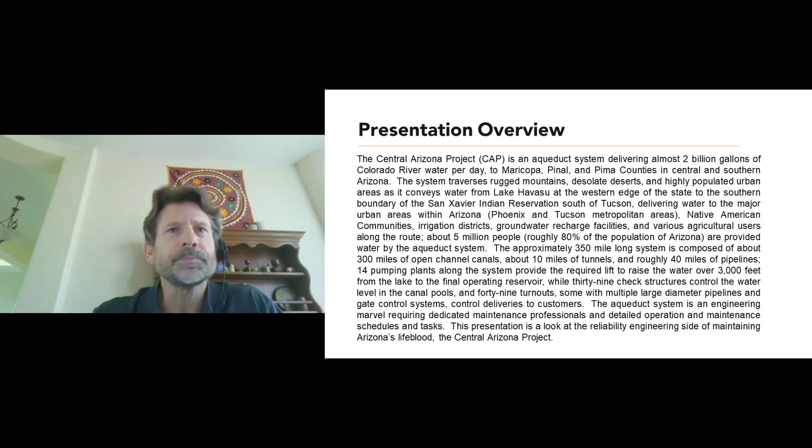What I'd like to do is just give a quick overview of the Central Arizona Project, or the CAP, a lot easier to say that. Talk about the pipelines in particular, that's my primary focus of responsibility, and then talk about what does a reliability engineer do.

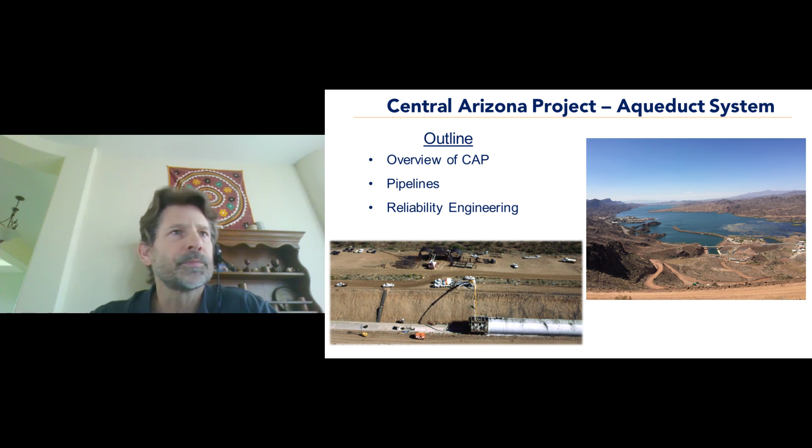Okay, so I give a lot of talks on the Central Arizona Project. And I half joke when I say we're just a water delivery company. We take water from point A and give it to point B. Point B being about 550 kilometers away, almost 1,000 meters higher in elevation.

We are a desert, and one of the things I want to point out is we get less than 20 centimeters of rainfall annually. In the last couple of years with the drought, we've been getting less than that.

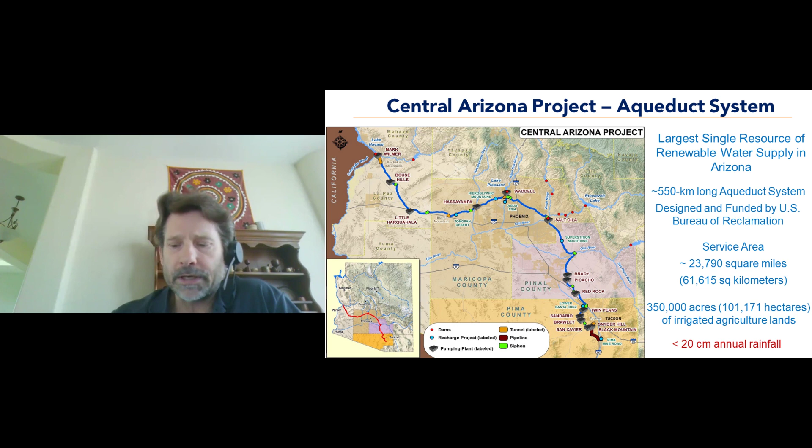It takes a lot of infrastructure for us to move water across the state. So some of the major assets we have are 15 pumping plants scattered along that 550 kilometers, 39 check structures, and multiple check structures between pumping plants to control the flow of water and to keep the elevations different in the pools as needed for making deliveries to our customers. We turn out water to our customers through 49 turnouts scattered across the system.

We've got 6 groundwater recharge facilities that we have been using to recharge groundwater aquifers, but with the reduction we've had to take on the Colorado River this year and last year, we are no longer doing any recharge. We also have about 3 inline reservoirs that help us regulate the flows through the canal, and one large offline reservoir.

With an earthen dam, and that's this picture right here, Lake Pleasant, an enormous lake about 20 minutes or so north of Phoenix, with a large earthen dam.

What we're seeing here are the intake towers to the pumping plant. Actually, this is the pump generating plant. In the fall and winter, we fill the lake, pulling water off the Colorado River, and then in the hot summer months when electricity is very expensive, we're actually pulling water out of the lake and sending it down to our agricultural customers.

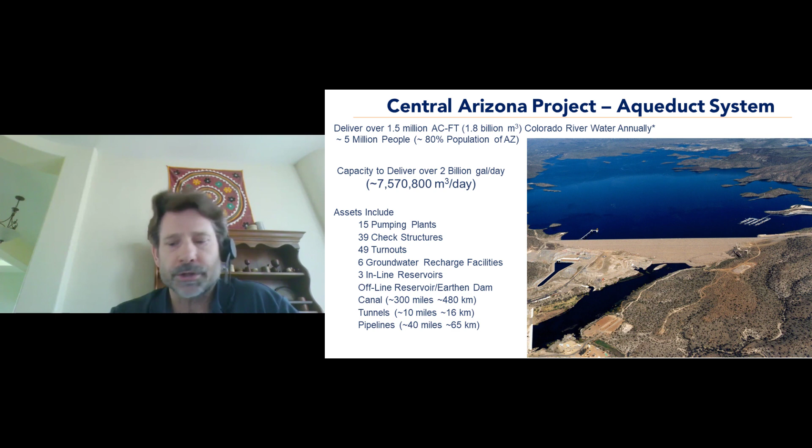So remember that first picture we looked at, our first pumping plant? I was standing up here at the outlet of the 2 steel discharge pipes that bring water out of this pumping plant. We lift it about 250 meters to this point over about, I think it's about a kilometer to get up to there. And then from there, it goes through a 12-kilometer tunnel, flows by gravity down to one of our next pumping plants.

But one of the big projects I had just a few years ago, over 2 different summers, was relining these 2 steel pipelines. They actually start about 100 feet below the bottom of the lake here.

And over here, this is just a typical pumping plant. It's one of the larger ones out on the western side of our system, but all of the plants have the canal leading into the forebay, and through however many pumps we happen to have in whichever pumping plant that is, it just lifts it up and then flows by gravity down to the next pumping plant.

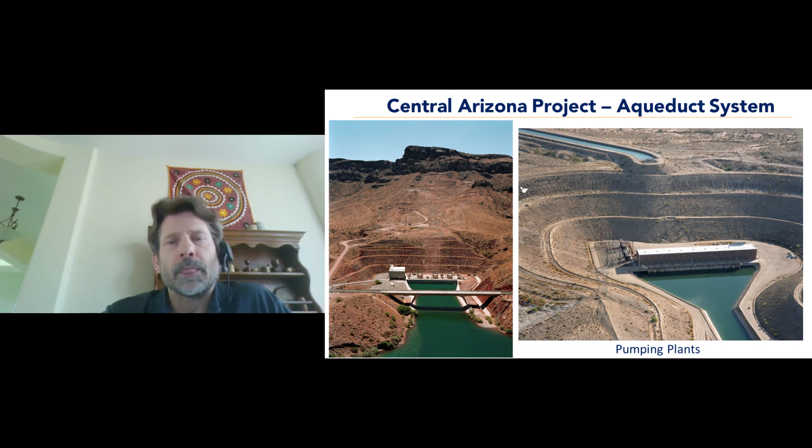What this graph is showing is just the lift that we have at each of the pumping plants. So this first plant lifts water about 250 meters, and it flows by gravity to the next plant, where it lifts it again. But all told, we're lifting water about 915 meters to be able to get it to our last operating reservoir. And then from there, it flows by gravity to the final bit of our system.

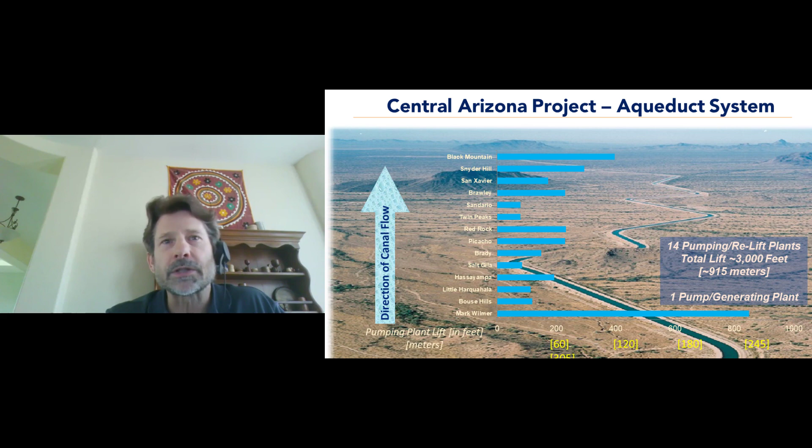We also use them to regulate flow or stop flow going into our pipelines and tunnels going across the state.

I was underground most of that day. One of the things as a reliability engineer, we also evaluate these radial gates, and in a 5-year cycle we're out inspecting every single one of them, making the determination of which ones we need to repair next. Sometimes we'll just pull the whole gate right out of the structure, send it back to headquarters, and refurbish it. And while that's happening, we have dropped in the spare gates that we have.

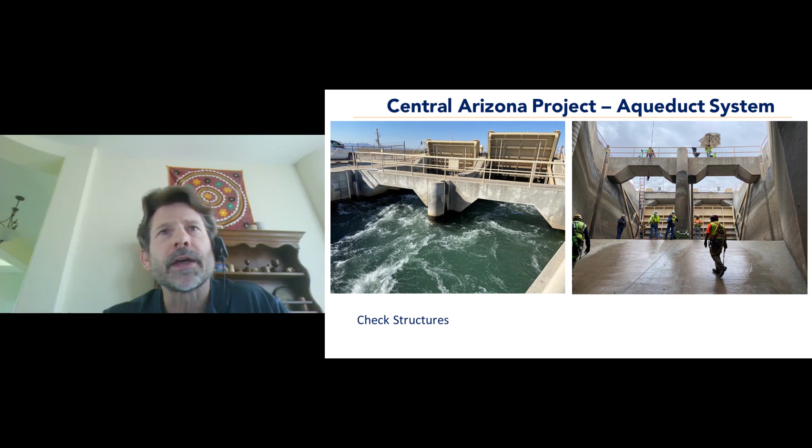I've also been tasked with redesigning, and have done, all the cathodic protection system for all these gates.

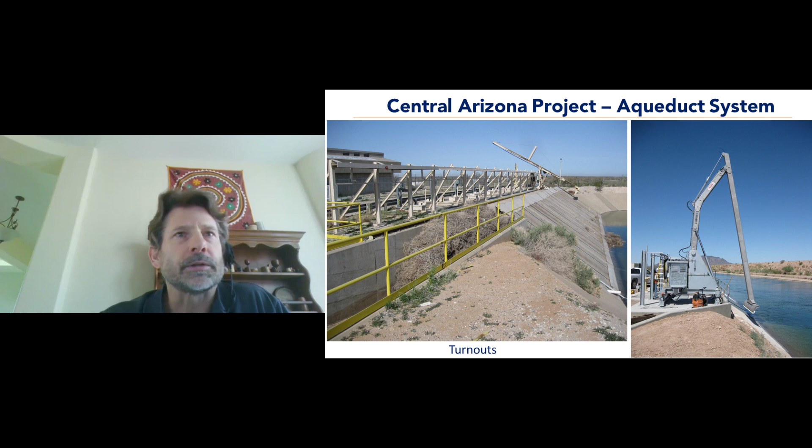A couple other pictures of turnouts. We get a lot of debris built up in the turnouts as the velocities drop, so occasionally we get in and have to clean them out.

What happens when the sediment builds up, in some cases it actually blocks the flow meters from giving us good signals, and we're either overcharging or undercharging our customers. In this case, you can also see one of the ribbon anodes, particularly the steel flow meter section, needed to be replaced. This was actually a fun project.

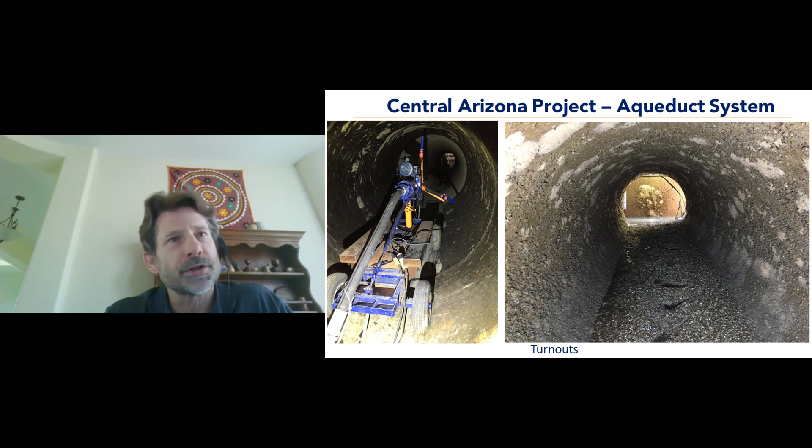I was working with our protective coatings crews, looking at better, more efficient ways of maintaining the steel portions of the turnouts. Our safety protocol only allows a person to be sandblasting or abrasively blasting for 1 hour every shift, and it would take us a week to get through taking care of one turnout. With the evaluation and subsequent purchase of one of these blast robots, we were able to cut the blast time down from a week to just under 5 hours, saving a tremendous amount of time.

And groundwater recharge. Because of the drought on the river right now, our largest recharge facility has been mothballed. Actually, that picture I showed you of the trash rake I designed was for this system.

I'm going to take a moment, get up on a soapbox here and talk about this recharge facility. I designed this one back in the mid-90s when I was working for a consultant. I had no idea I'd ever end up working at the Central Arizona Project. It's got about a 5-kilometer, 1-meter diameter steel pipe bringing water to the recharge facility. There's a huge pecan grove right here, and Mexico is just south of us right here.

But Tucson Water still uses this recharge facility for recharging their CAP allocations. The facility has been expanded and modified a couple times. But the point I want to make is, as a young engineer who did the design of this, I'm now a senior engineer at the facility maintaining the system. And whenever anything happens on it, because my name is all over the design drawings, I get the phone call.

And we're finally getting the SOPs rewritten on this, and I keep getting the workflows to help rewrite the SOPs. So I'm not sure who's all on the presentation here, but if we've got younger engineers, think about the design you're doing and what the long-term ramifications of the design are based on how it may be maintained.

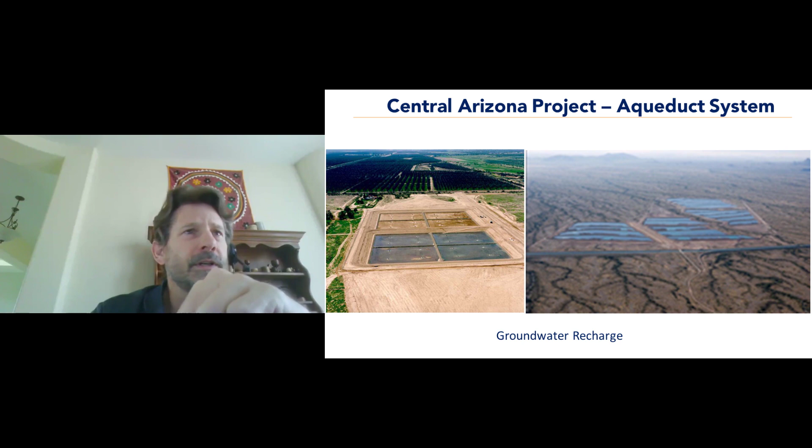Now we get into the pipelines. This is a picture of one of our large diameter steel pipes. I took this picture as we were coming back out of an inspection a few years ago, with the inspection team coming out.

The vast majority of our pipelines are pre-stressed concrete pipe, mostly with cylinders, though some are non-cylindered. They range from 6 foot to 144 inch, or 12 foot. We also have some larger diameter steel pipes, and large diameter siphons. A lot of my time is spent working on those siphons, tracking what's happening with them, particularly the steel and the pre-stressing, because we do have a lot of distress in the pre-stressing wires in those pipes.

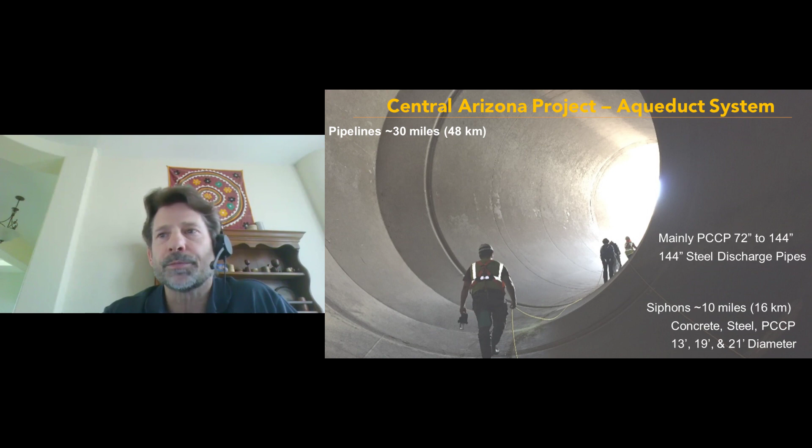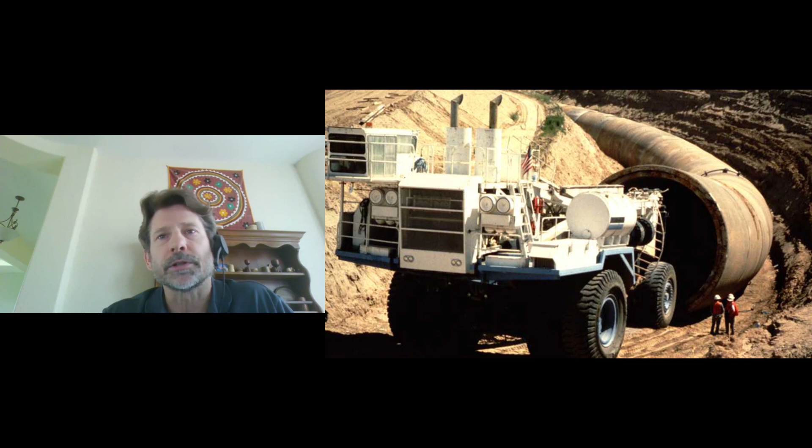Another big picture Jason wanted me to show. This is actually the pipeline from that first picture I showed of a pipe being repaired, here it is being installed. It gives you an idea of the scale of our facilities. This was specially designed and built, what they call a pipe mobile, for installing the pipes.

This is one of our steel pipes. We were doing an inspection of the coal tar epoxy liner, taking dry film thickness readings. In this case, we're doing an electrochemical impedance spectroscopy test, looking at the efficacy of the liner. In some places where the liner looks good, it actually is intact; in others, there are tiny holes allowing moisture to penetrate down to the substrate. That's what we're trying to figure out, where to go in and do maintenance on these liners.

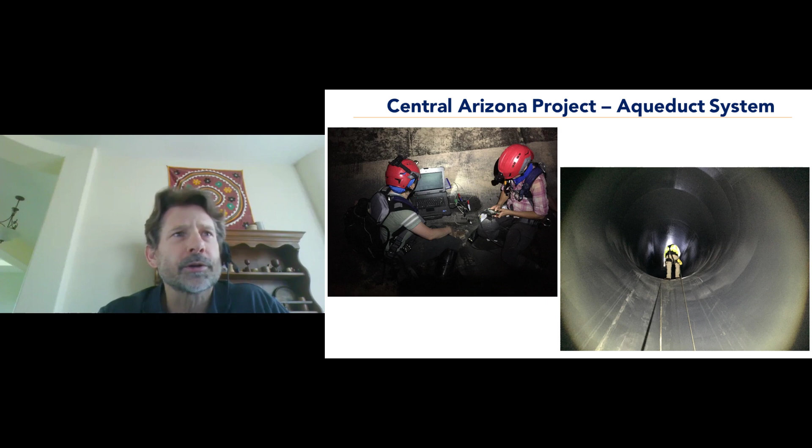This is the discharge pipe from that first pumping plant I was talking about. Working with one of our inspectors here, I actually got rope certified to do inspections on this pipeline because of how steep it is. We're dropping down on ropes into the lower section, inspecting the freshly blasted steel before the contractor puts on the new epoxy liner.

This picture gives an idea of the size of the pipe and what it takes for us to get in and out of it. A lot of ladder crawling.

Here we are abrasively blasting with a robot one of the large diameter steel pipes to reline it. Just to show we also have some smaller diameter things, here's one of our mechanics working on a sleeve coupling. We had some differential settlement between one of the vaults and the pipe, which caused a small leak.

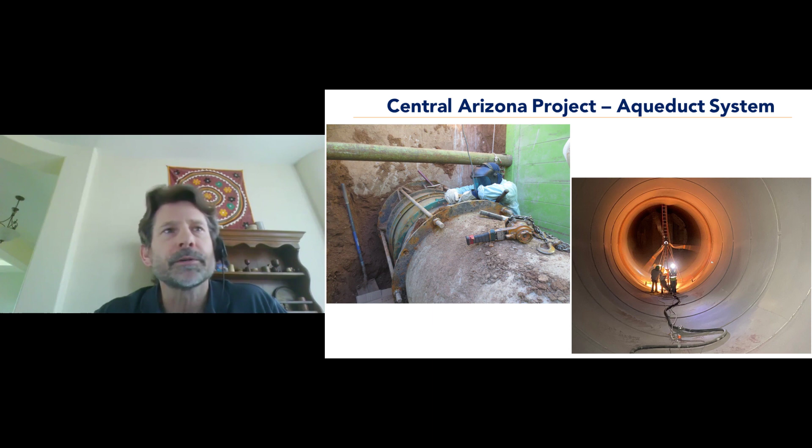So I'm going to get more into what a reliability engineer does, or at least what we do at CAP to reliably operate our system.

Really, reliability is a probability. You can look at it as the probability of success, but we look at it as the probability an item or an asset is going to perform its intended function without failure for a particularly stated period of time in a specifically stated operating condition.

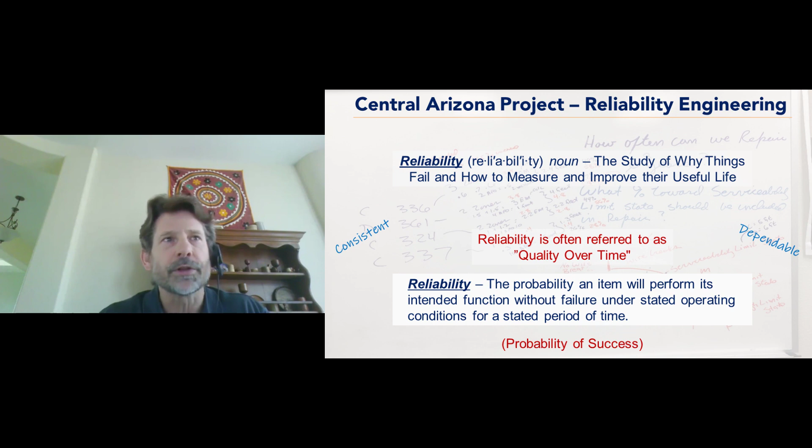I know there's a lot of specifics to that, but you cannot expect an asset to perform other than how it was intended to, or how it was designed, what it was intended to do.

So some of the typical tasks we do in the reliability engineering department: we perform inspections, we gather data. In some cases, we have condition-based monitoring systems that gather the data for us and then send it to us via email, via our SCADA system, whatever we may have.

But then we analyze the data. From all that data, we develop our preventative maintenance procedures and tasks. We establish the maintenance schedules. We work with our crews. When are we going to go out and do this work?

We work around the outages that we can take from operations, or we work within the constraints operations has given us with their outages. We also often determine the repair schedule, and we are usually the ones doing the designing.

So the big thing in reliability engineering is we identify the asset's function. Then we look to see what failures may cause that asset to no longer function the way it's supposed to. We call that a functional failure.

Then we look at what the failure modes are that may cause that functional failure. And then we further look at the consequences of those failures, and from that help establish the priorities for doing the maintenance procedures and the priorities of maintenance that we want to do on various assets.

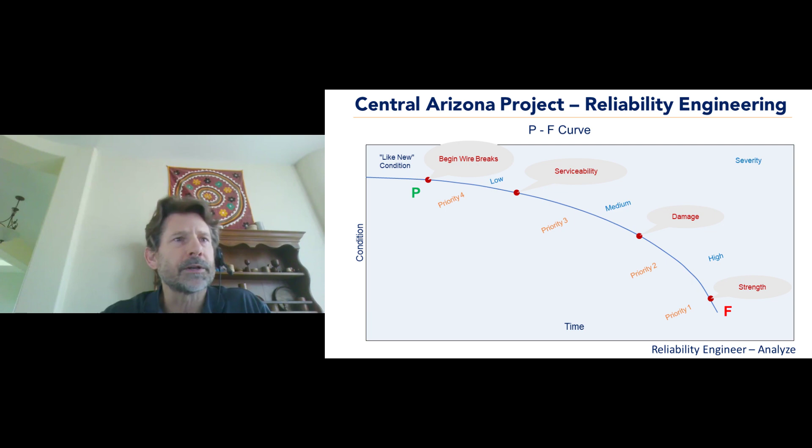What I'm showing here is the data that has been collected on what we call our Jackrabbit pipeline. It goes under the Jackrabbit wash, but it's a very short pre-stressed concrete pipe. It's only got 63 pieces of pipe in it.

So what I did on the y-axis is just number the pieces of pipe, and on the x-axis is time, showing every 6 months since 2014 when this condition-based monitoring system went into place.

And every time a wire breaks, I get an email. And I've been plotting those emails over the years, plotting those wire breaks over the years, and a trend developed. You can see the downstream section of the pipe seems to have more wire breaks.

And then I realized those wire breaks really tend to clump in the warm summer months. So then I took water temperature, and we've got a thermometer in the canal measuring water temperature, and I started plotting the water temperature over here on this y-axis.

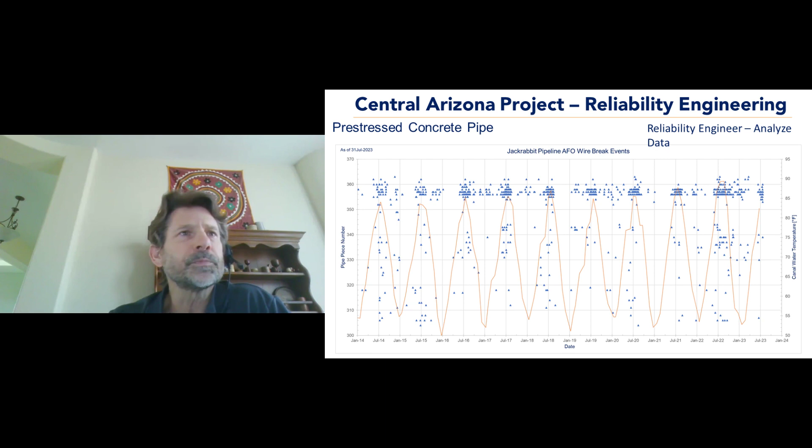And I can see when the water gets above a certain point, we increase the rate at which wires break. So still doing analysis, I've taken that information, and all of this, the information right here is from a single pipeline. We've looked at internal inspections where we've gathered broken wire data, the AFO, or our condition-based monitoring system, and I've plotted that by piece number to see just what is going on.

Here's just a quick graph of water temperature versus the month and the number of breaks we happen to see in a month. You can see that significant increase during the warm summer months.

And I've been looking at the data over time. This is data for the entire pipeline. Whereas over here now, I'm looking at a single piece of pipe in the overall system. I'm trying to predict, based on all the data we've gathered, when we will hit that serviceability limit state that I showed you on the P to F curve, back that out and determine when do we need to go in and do maintenance on the pipeline so we do not hit that serviceability limit state.

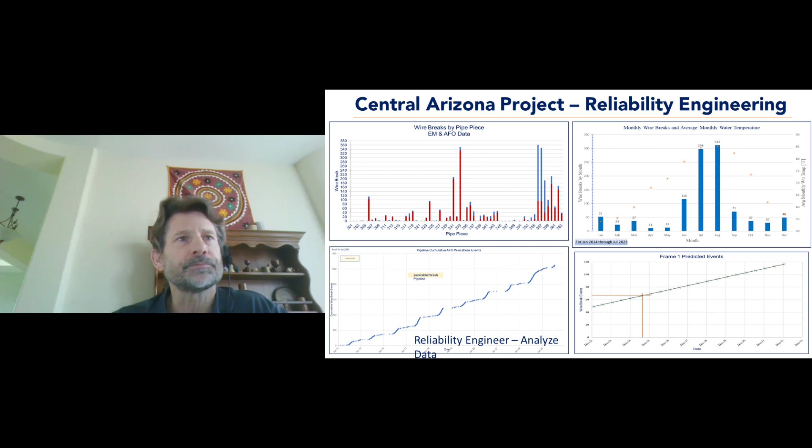On our steel pipes, we gather the dry film thickness, or what the thickness is of the liner that's protecting the substrate. This is a plot of the electrochemical impedance spectroscopy. Anything below 10 to the 7th is bad. You're really not protecting that steel anymore.

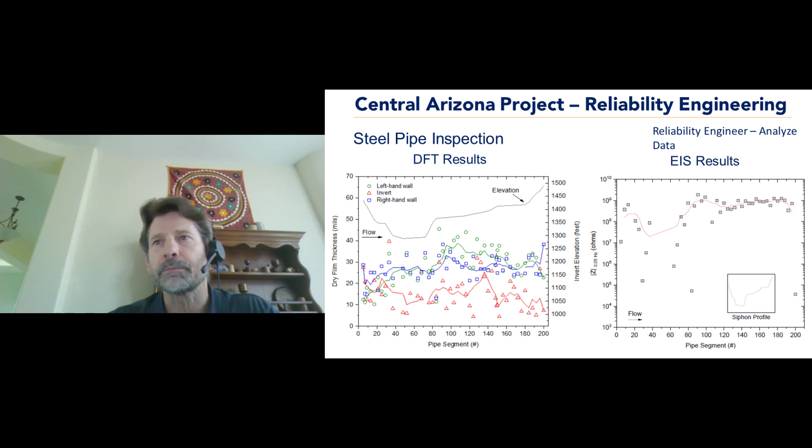And I didn't realize it until I was going over this presentation. I meant these are from two different pipelines. I meant to have the same pipeline so I could show some of the trends that we saw. But from this plot, we know we need to actually go do some repair on the first few pieces of pipe, more so than the downstream end.

Then, of course, we've got to look at our risk, what the risk is. So we use our risk matrices to help with that. And all we're doing is plotting the consequences of what that failure may be versus the likelihood. And from that, you come up with a risk priority number. Some agencies will add the consequence to the likelihood, others will multiply, but it really does not matter as long as you're consistent in how you're analyzing that.

And through the maintenance tasks that we're coming up with, we look at whatever may be in a high risk, and we try and pull that down through an increase of frequency of the schedule or more invasive maintenance that we may want to do, to try and pull us into a very low risk priority number. So for pipelines, I look at an individual pipe piece, then I take that to the overall pipeline to see what the risk may be for that part of our system.

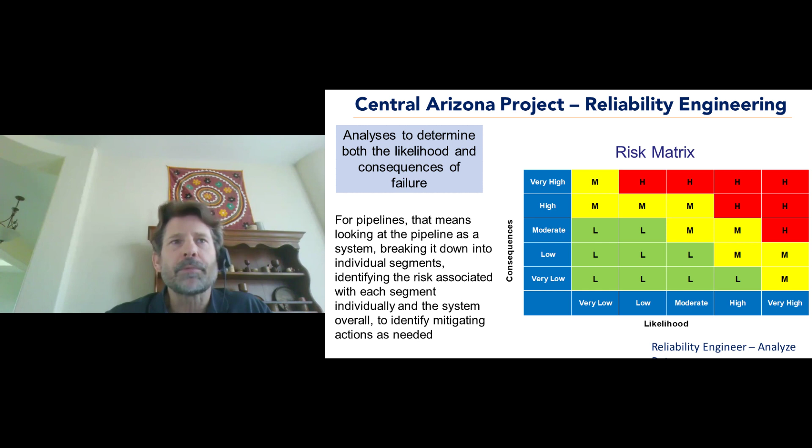This is a picture that was taken of one of our large diameter pipes, and I like it because it shows the teamwork from one of the other reliability engineers. Our reliability engineering supervisor giving me his foot so I can reach higher up, and I'm marking something on the pipe wall from a reading I've taken.

One thing I'd like to mention is the reliability engineering versus a design engineer. The design engineer will ask how he or she can make the system work, while the reliability engineer asks how the system may fail to perform its intended function and what we need to do to make sure we can maintain that function. And I'm going to leave everyone with just this thought, but the intent of maintenance is to prevent the failure from occurring. It's not to go in and restore that asset after failure.

So as we're working on our engineering projects, we're doing our design, think about the long-term maintenance and think about what the best way would be to maintain our system.

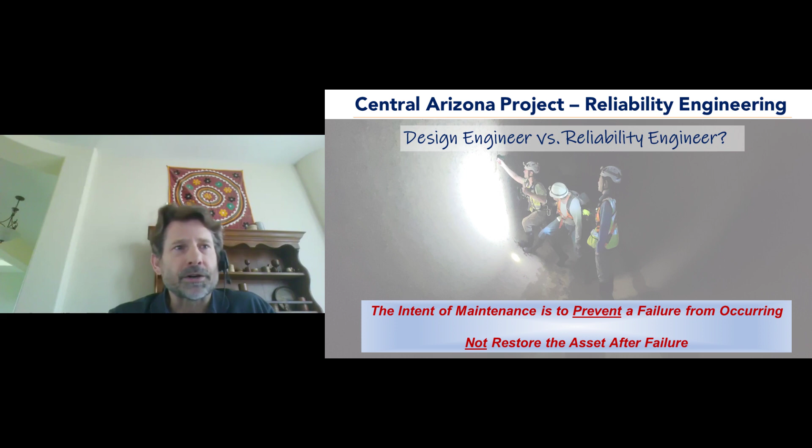Awesome. Thank you, Jim. That was a great presentation.

We've got a few questions here. One of them - even when I was living down in Arizona, I lived fairly close to one of the CAP canals - how much water is lost to evaporation as they're transferring water through these canals? What's the length of the canals, and how much evaporation actually occurs?

I don't know the volume, I haven't sat down and recalculated that, but it's about 1.5% of what we move through the canal that's lost to evaporation. It's not that much considering how much water we're moving.

Very true. I've got a few tough ones for you now. So you talked a bit about what I'd consider smart infrastructure - you're monitoring the wire breaks, getting emails back that give you the event status. Are there any other assets in the CAP system that are monitored in the same way? Is there smart infrastructure and sensors beyond just the pipes, like the trenchless pipes? Are other assets monitored similarly?

We do not monitor any of the other pipelines that way, but within the pumping plants we've got an entire condition-based monitoring system we've been working on. We remotely monitor the temperature of the pumps, the vibration of the pumps, the oil in the transformers - those are the three that come to mind specifically. With the flow meters we have, we can monitor the flow through each of the pumping plants and each of the turnouts, and determine if there's an imbalance in the system where we may have a problem.

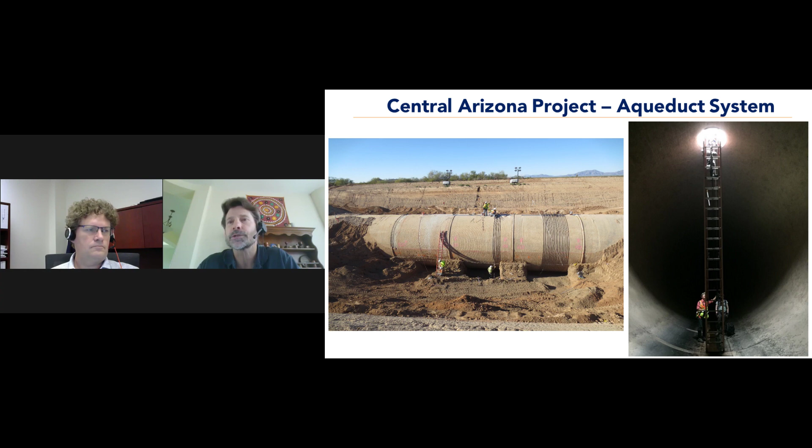We have security fences along the canal. On the right side of the canal, and right side is always as you're looking downstream, there's a 10-foot easement or right-of-way that we still have, but we maintain that as a trail for Arizona. So the right-of-way varies depending where we are, but there are many, many bridges that cross us, especially when we get into an urban area like Phoenix or Scottsdale. Typically every mile there's a bridge that crosses us. We also have, out in the more remote areas, wildlife bridges just for wildlife to be able to move across the canal.

It's interesting when you live in Arizona, these canals are everywhere. They're going right through Phoenix, they're going through Scottsdale. It's just integrated within, like another road essentially going through town. There's regular bridges, the streets go over top of them, and it's pretty natural looking actually, just like they belong there.

Got another one here for you. This might be a little bit open-ended, let's see where it goes. You've spoken about maintenance on your pipeline. Can you tell us about your program for pump stations and electricity supply?

A little bit, I'm not that familiar with the maintenance systems for the pumping plants. For electricity, that one's a little easier to answer. We used to get all our power from the Navajo Power Generating Facility, a coal-powered or fueled power plant in the northeastern section of Arizona. That was decommissioned a few years ago, so we now purchase power on the open market.

We've got a whole group in our admin department that takes care of purchasing the power. Sometimes we'll get power at an extremely cheap rate, and we'll decide to shut the pumps down if we can and sell that power to make money and run the pumps later. It's not something that I get into, I'm just aware of it because it sometimes affects the outages that I'm trying to take, or it affects our outage extension that we can have.

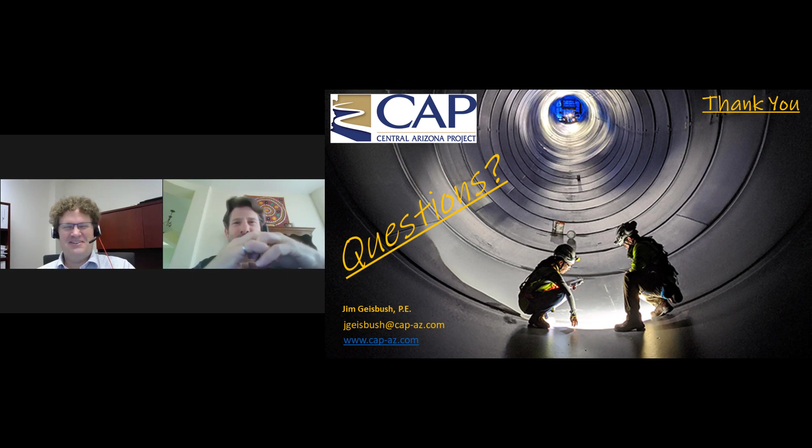Part of it could be, yes, but that's a very good question, and it does kind of bother me that we've had to stop our recharging right now. But when the recharge facilities were designed and built, we were pretty certain that would be the case at some point in the future. We ceased to recharge, and now we're trying to extract that water out to augment what we're not able to pull off the river. Hopefully the river will start flowing more water again is the long-term hope, but none of us can really tell the future.

So we are looking at other sources of water. There's talk of desalination, either down in Mexico or over in California, and moving the water to us. There's also potential for trading water with other entities. That's one reason SRP is looking at being able to give us water — they get water off the Salt River and the Verde River here in Arizona, and if we can move water for them, that would help us.

The city of Phoenix just put in a very large pipeline taking water from the southern part of the city up to the northern part of the city, where I live, and we rely on CAP water, whereas the southern part of the city gets more SRP water. So there's a lot of inner workings amongst the municipalities trying to look at how to augment water, and then we are certainly trying to conserve water as well.